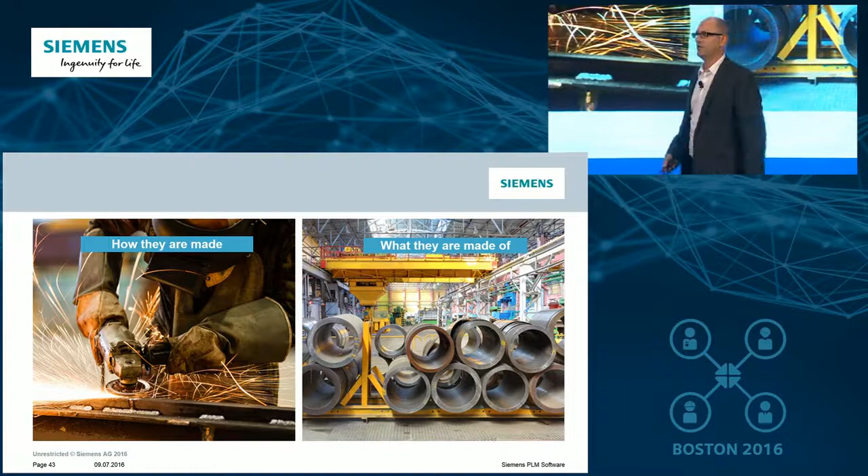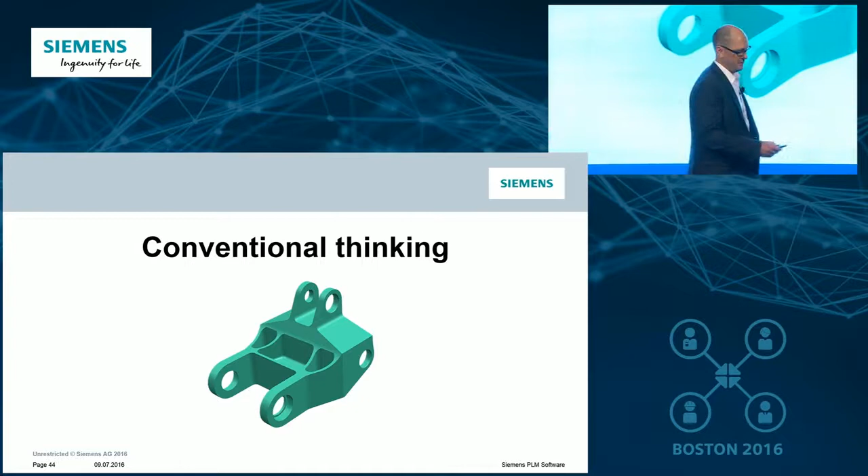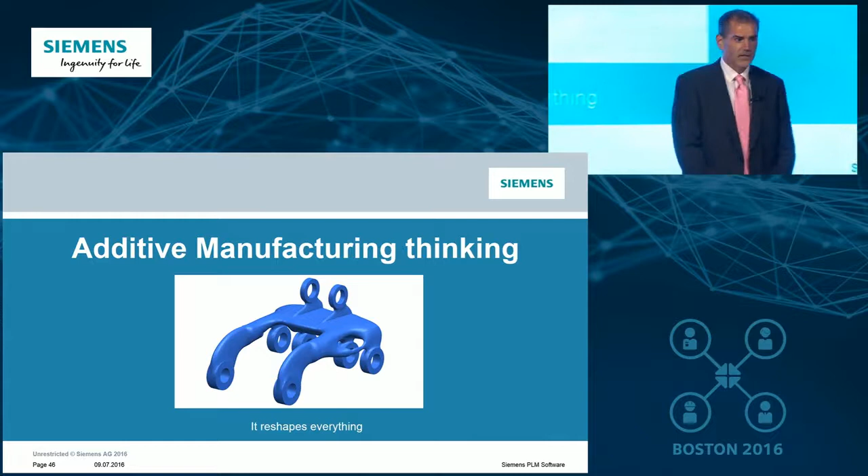Conventional thinking also limits our performance in manufacturing. To make this part could require as many as 2 CNC machines, 7 different operations, numerous cutting tools. And all of this adds up to time and cost. Now is the time to rethink everything, and we believe now is the time to adopt additive manufacturing. With additive manufacturing, we can now create new designs that are lighter, stronger, and never before have been envisioned, and we can manufacture them in an agile, cost-effective process.

Here we're comparing the difference between conventional machining and additive manufacturing. On the left, you can see conventional thinking. This is a block of material that's been set up on a machine tool, for example, in a couple different orientations. And you can see the different machining operations. You can see the drilling operations, drilling the holes. You can see machining operations, removing material, so we end up with this final target shape of this part that we're trying to produce.

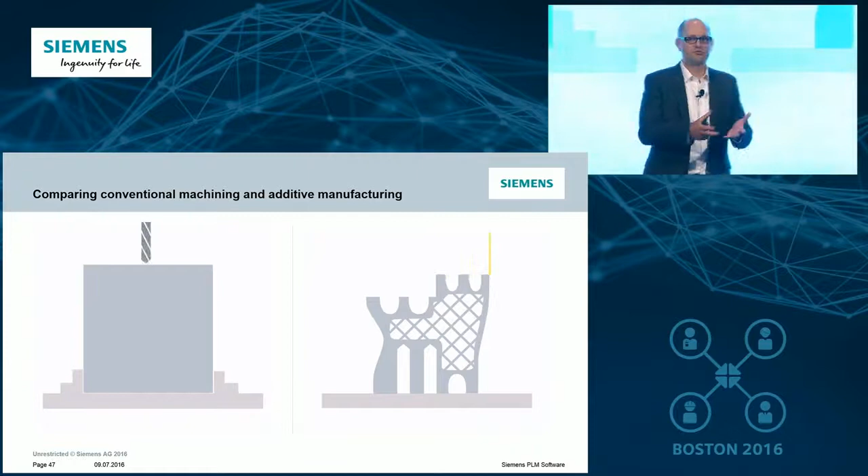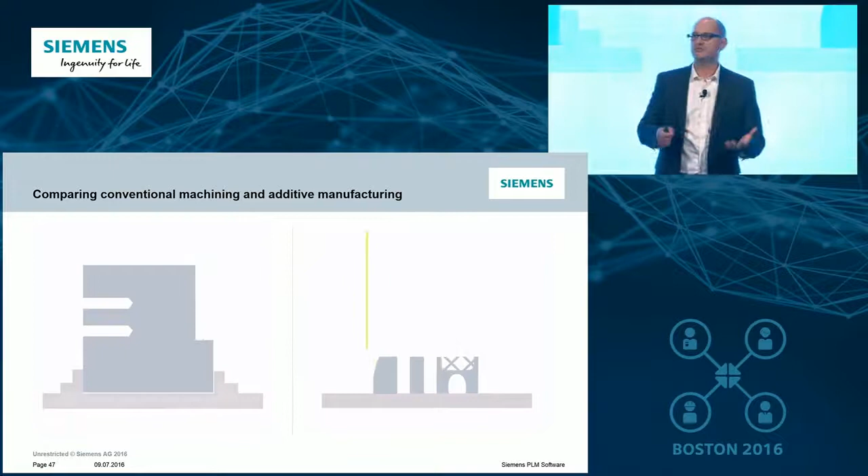Now, on the right-hand side, you're looking at additive manufacturing. Here we're able to produce a part in a single setup. The shape of the final part is very unique. It's very organic looking, something that we couldn't have been able to manufacture using a CNC machine tool. And on the inside of this part, you can see a honeycomb lattice-like structure where we've been able to take out a lot of material while still maintaining the structural strength of this particular component. And it's these new types of disruptive, innovative technologies that are really going to change products forever. It's time for us to start rethinking everything.

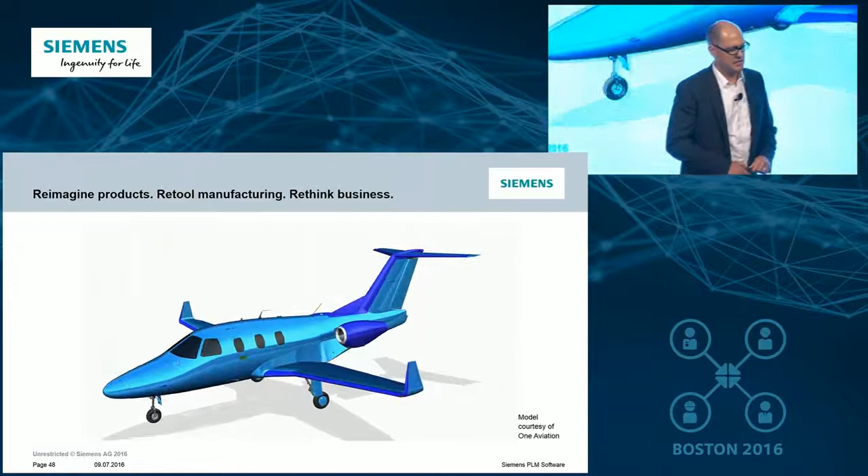This aircraft was designed over a decade ago by one of our customers, One Aviation, who thought differently about air travel. So using the latest technology available to them at that time, they pioneered a new class of jets, the very light jet. And aerospace engineers used NX for modeling, human-driven calculations, supplemented by CAE simulation optimizations to design a very lightweight, cost-effective, high-performing jet. But we've wondered, what if we could redesign this jet using the technologies available to us today? What would it look like?

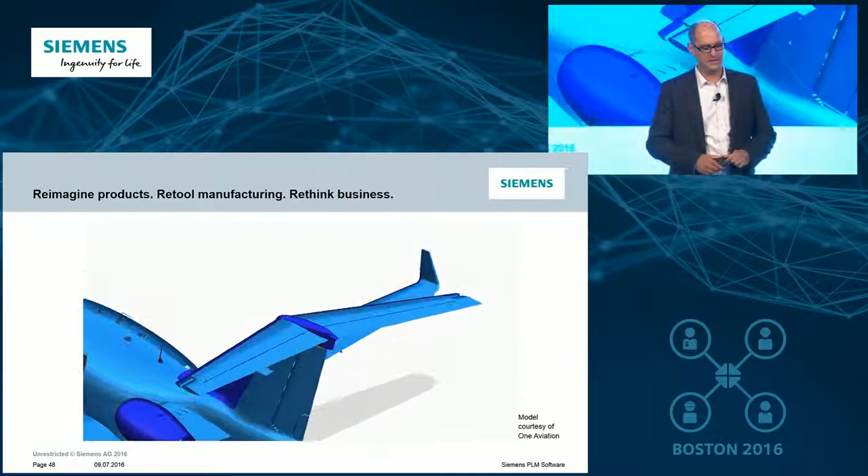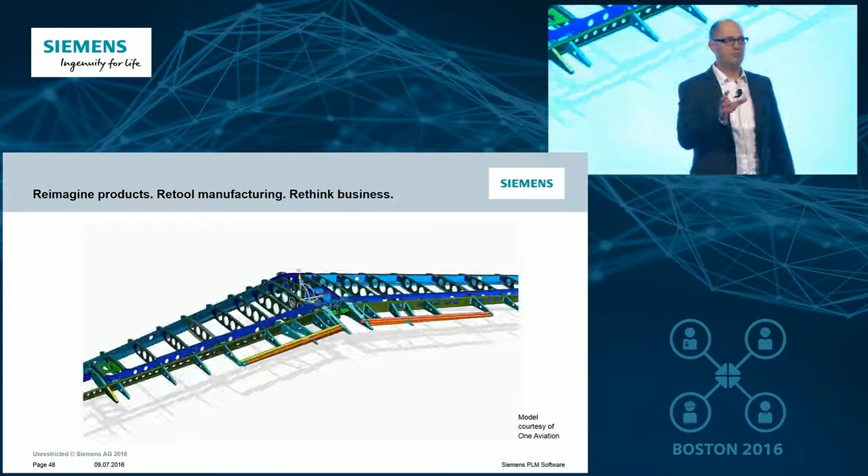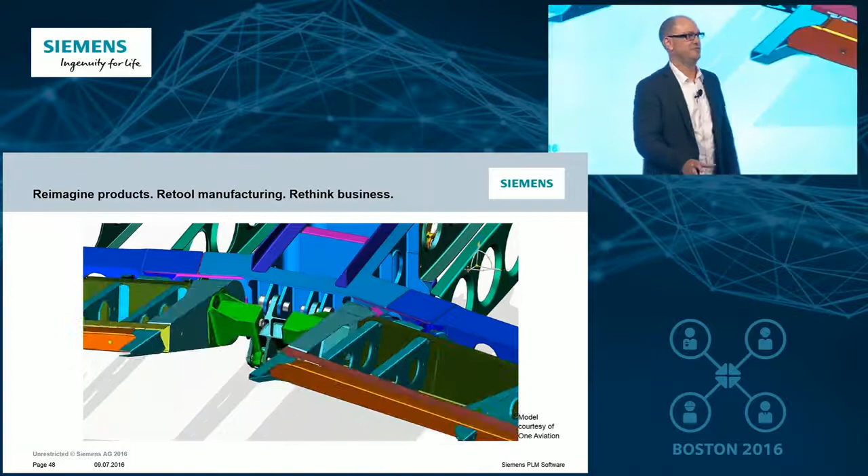Now, we don't have the luxury to redesign this entire jet today, but we can zoom in and we'll just look at one component, one part of this aircraft, the elevator bell crank in the very rear of the tail. And this is a critical component to the control systems of this aircraft. This component basically connects the actuation of the pilot's joystick mechanically to the elevators in the back of the aircraft that control its pitch.

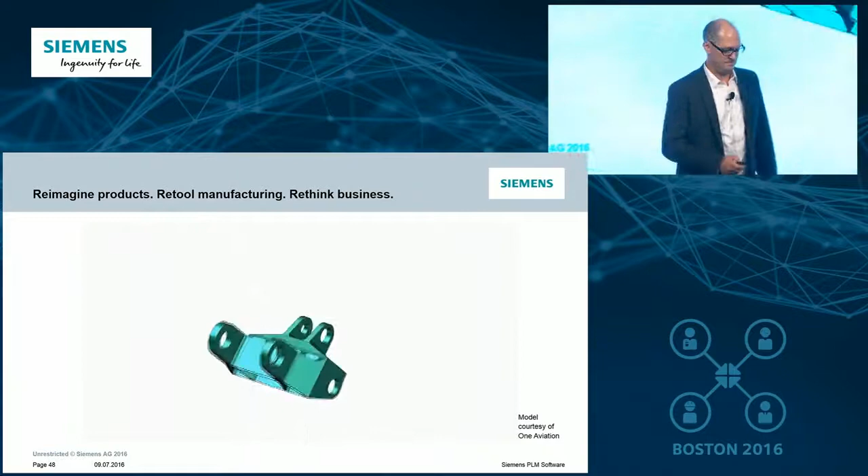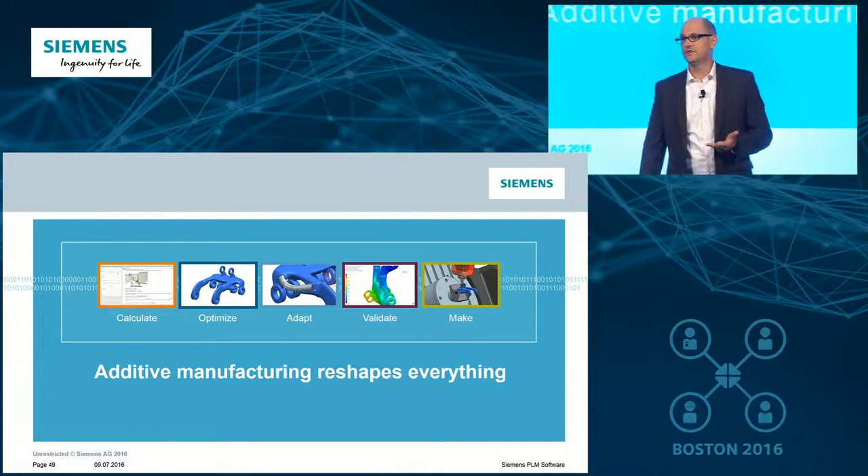And so let's have a little bit of fun. Let's try to break through some barriers. Let's apply additive manufacturing to reimagine this bell crank and try to design it lighter, maybe even stronger, and do so that we can increase the payload of this aircraft. Maybe we can now take an extra passenger on board with us when we go on a trip.

So as engineers, what we do today is we set up requirements and goals using analytical methods to help us define the physics that govern product performance. We use tools like Excel, intellectual property, prior knowledge, and even Google to set up these calculations. The problem with these calculations is they're not tied directly to the geometry which they need to create. So we believe there's a better way to do that.

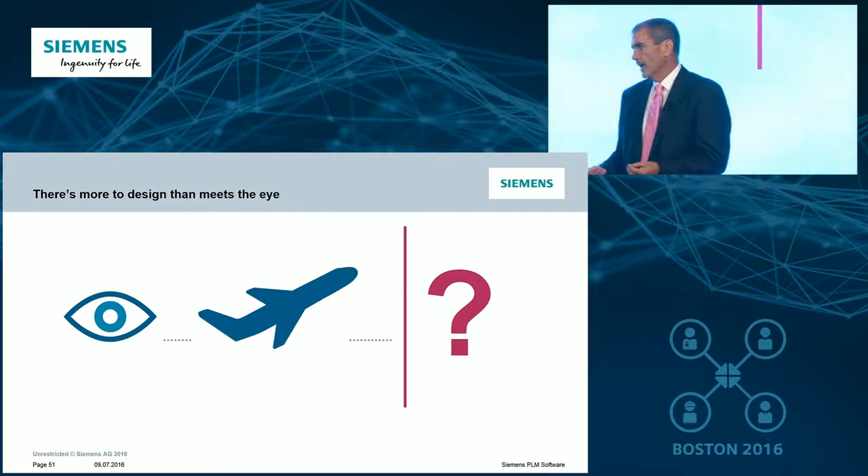And what we want to do is take all that math now and directly tie it into the geometry which it's going to need to create. So what we have is Paul now working on a change request. And what Paul's going to do is using Active Workspace embedded in NX. Being a designer every day, he doesn't have to go to another tool. It's right there. He has access to all the information he needs.

The request here is he wants to lighten up the elevator bell crank. So as he digs down through the information that was sent to him, he's going to come across the set of equations and math that dictates the performance for this part. He's going to go ahead and launch that part directly from inside of his CAD tool into the Symbolica tool, which is the rich math engine which we can set up all these calculations we need to do.

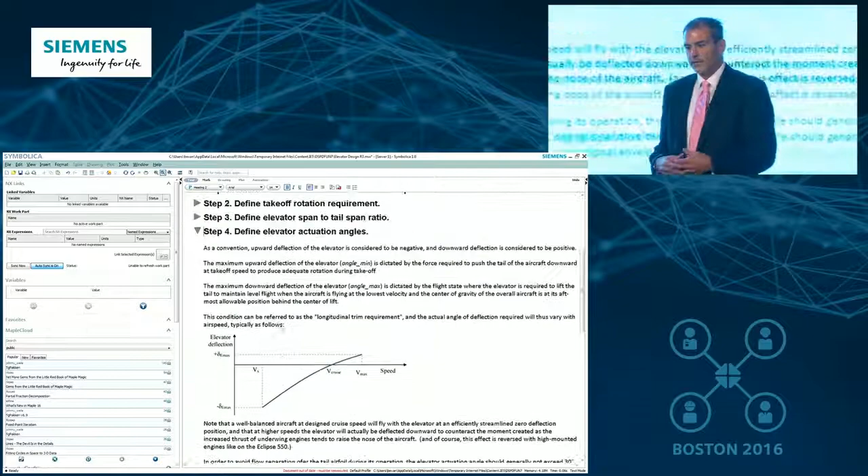And within Symbolica, it has the step-by-step processes of everything Paul needs to accomplish, and he can go ahead and look at it. It has all the pictures and images pulled from CAD so he can get a nice view of what he needs to do. What he's going to notice is it might be a little out of date, so he's going to quickly recalculate the entire set of equations at this point in time.

And as you look at that, all the numbers that are there and all the text that's in italics are all live equations. At any point, Paul could pick on those, change values, interrogate them. Also, on the left-hand side, he has the table list of all his variables and their present values. And on the bottom, you can see all the rich math functions that can easily be put into Symbolica. And if anybody's tried to do high-level math with Excel before, you know how hard that can be to do.

And the other nice thing, as Paul increases the mass at takeoff here by a couple hundred kilograms and recalculates everything, the beauty of having Symbolica now is I can use these values and tie them directly into CAD. And it's bidirectional. I can push these values into my CAD models, and as I change my CAD models, the values can come back here to retrigger all those calculations.

So we can see now, when Paul increases the mass at takeoff, he now has to worry about having a reactive force on the elevator bell crank of about 1,000 newtons. And we'll use that number later on in the next demonstration. So really what we have now is intelligent models that can unleash our engineering potential within our organization. We can tie it all together.

The next step we're going to do is optimize. Today's optimization usually occurs after an initial design has been created to get an incrementally better model. And this optimization is usually performed by a CAE analyst using specialized tools after initial design.